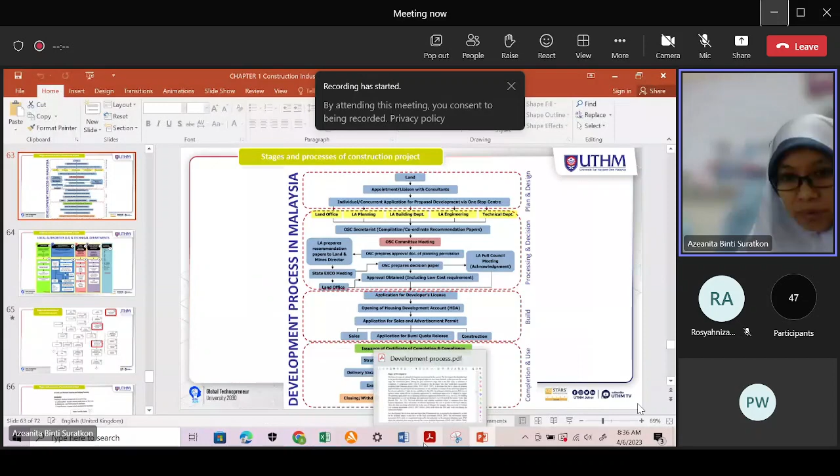We will see a little bit what is OSC after this. So and then we go to this part, maybe we go to this first line. This is the explanation for the development. There are 3 stages in project development.

The first stage is planning stage, or we call it pre-development period. The first stage is to get the approval. As you can see just now, we have to go to the OSC to get the approval for the development. Then goes to the second stage, which is the construction stage, and then continues with the post-construction stage, which is the third stage, a certificate of compliance, CCC. Certificate of completion and compliance, that is CCC.

And then they will complete their house. Once the developer completes their house, they will get this certificate of completion and compliance. So we have here OSC, one stop center. Let's have a look at this one stop center.

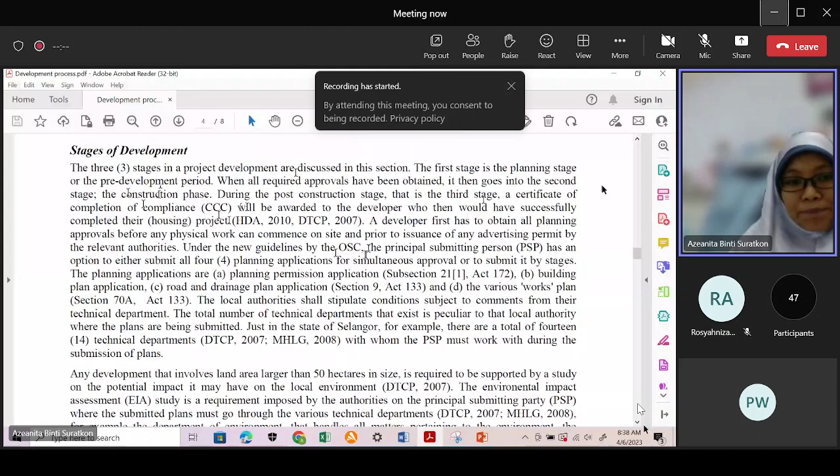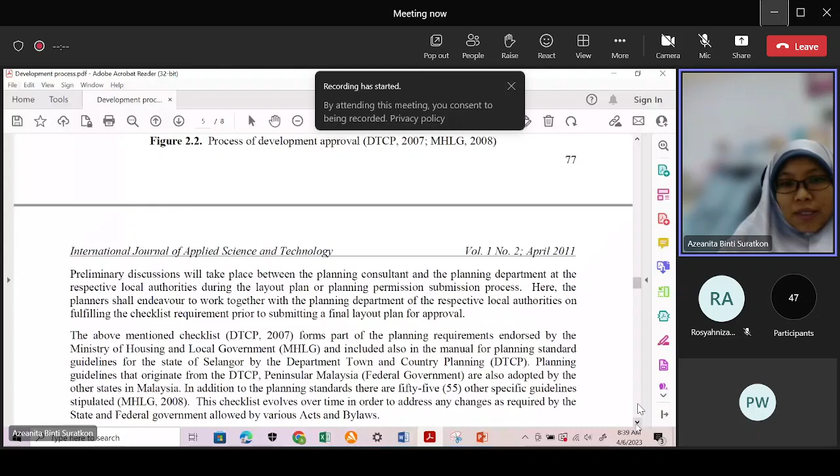Okay, let's go to one-stop center. What do we call this one-stop center? Okay, sorry, we are on this one-stop center. This one-stop center is actually an independent body.

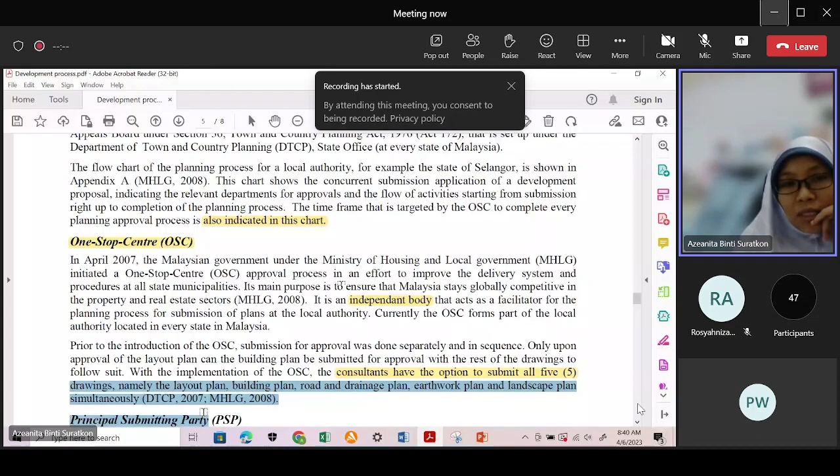It acts as a facilitator for the planning process for submissions of plans at the local authority. Before this, we had different local authorities, so consultants needed to submit to different local authorities. But by having this one-stop center now, the consultants can have the option to submit all 5 drawings - layout plan, building plan, road and drainage plan, earthwork plan, landscape plan - simultaneously to this one-stop center. The one-stop center is normally at the local authority, at state council, maybe local municipal majlis daerah, something like that. So we have this one-stop center.

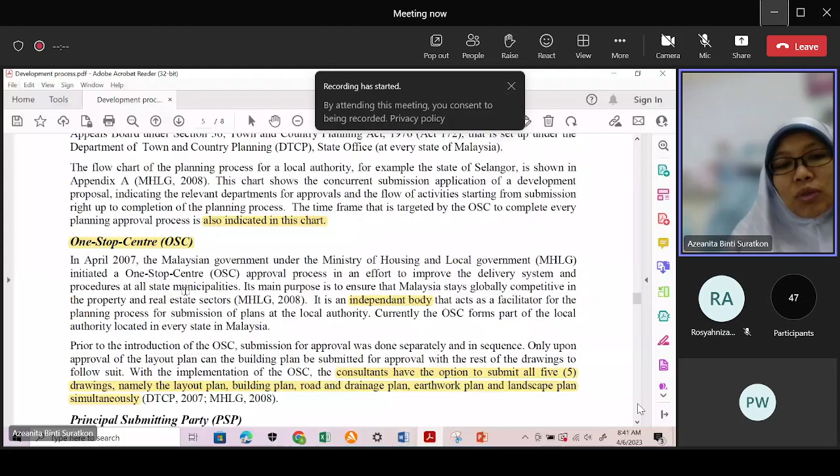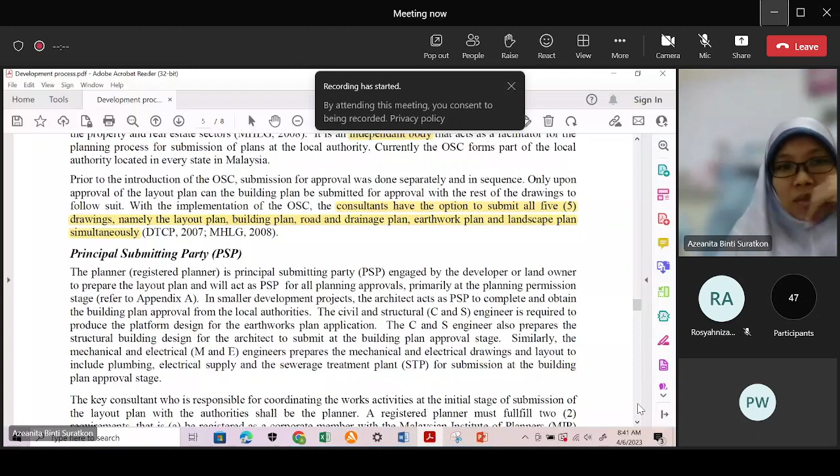We also have this important terminology, principal submitting party (PSP). Who is the principal submitting party? Normally the registered planner is the principal submitting party, engaged by the developer or landowner to prepare the layout plan and act as PSP for all planning approvals.

Primarily at the planning permission stage, normally it's the planner. In smaller development projects, it's the architect. So for a specific construction project, the architect acts as PSP to complete and obtain the building plan approvals from the local authorities. For big development, like town development, it will be covered by a town planner as the PSP.

But for very specific, smaller development projects, the architect acts as PSP to complete the building plan approval. Normally for a specific project, we just focus on the building plan approval.

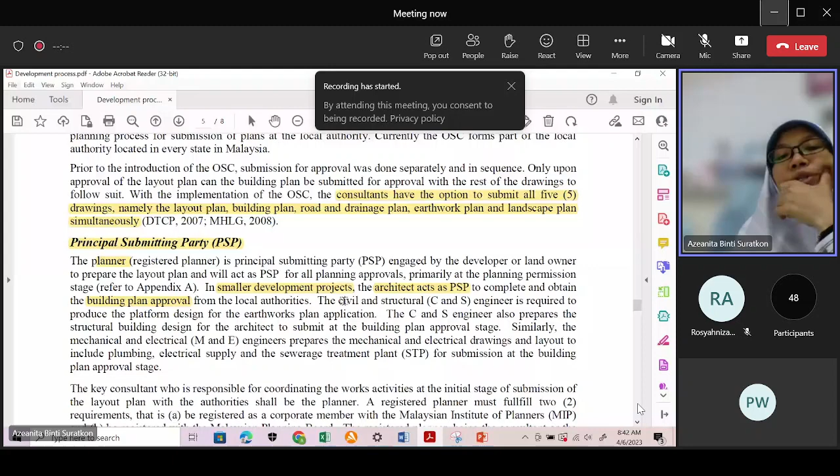All of you civil engineers in the making - the civil and structural engineer is required to produce the platform design for the earthworks plan applications. The C&S engineer also prepares the structural building design for the architect to submit at the building approval stage. Similarly, the mechanical and electrical (M&E) engineers prepare the M&E drawings and layout, including plumbing, electrical supply, and the sewerage treatment plant, for submission at the building plan approval stage.

So this is in detail - at the building approval stage, not only will architects submit their plan, but you as well, as a civil and structural engineer, and also mechanical and electrical engineers, have to submit your plans for building plan approval purposes.

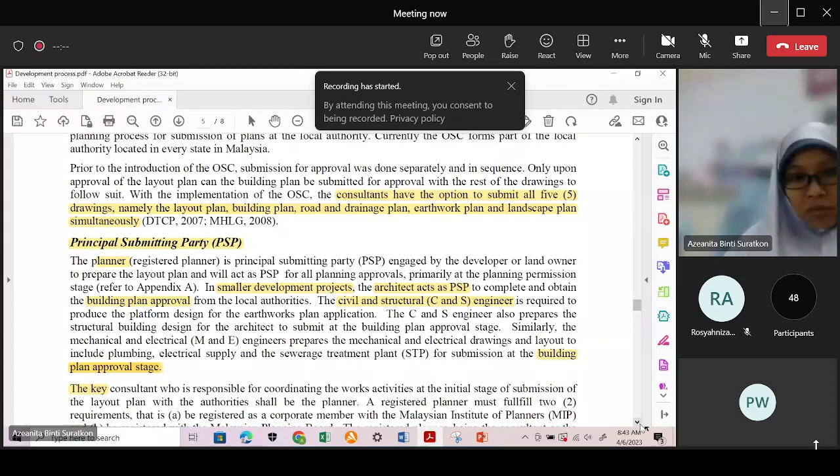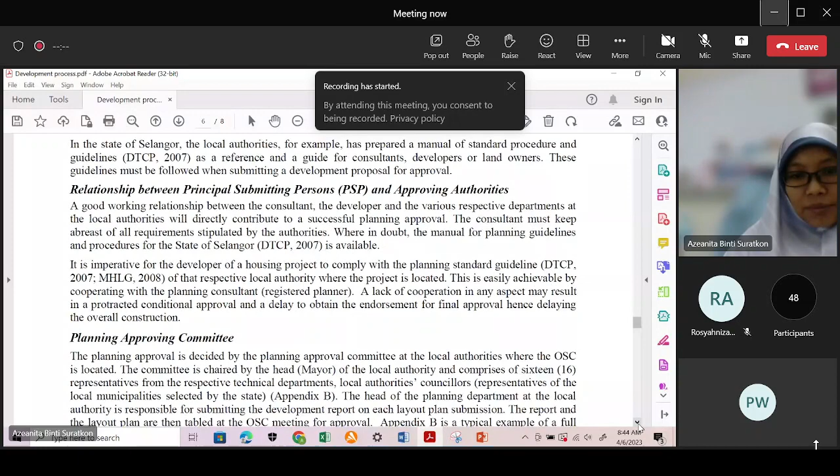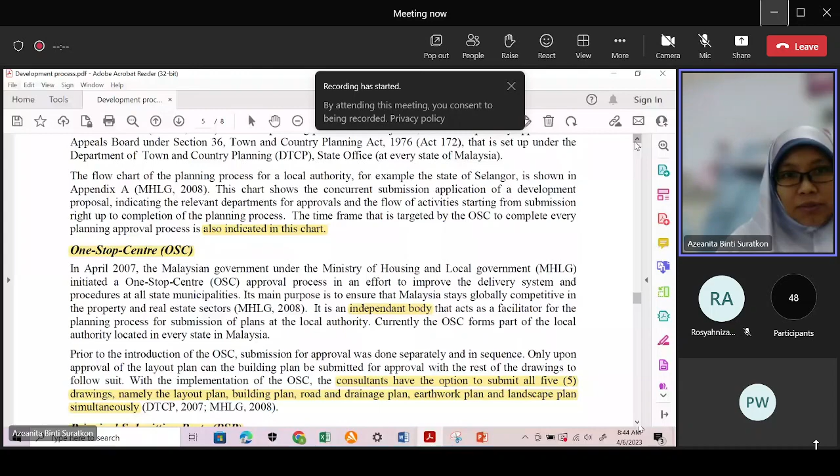So this is some of the things which I think are important - this is for Selangor. Let's have a look, I think this is also important.

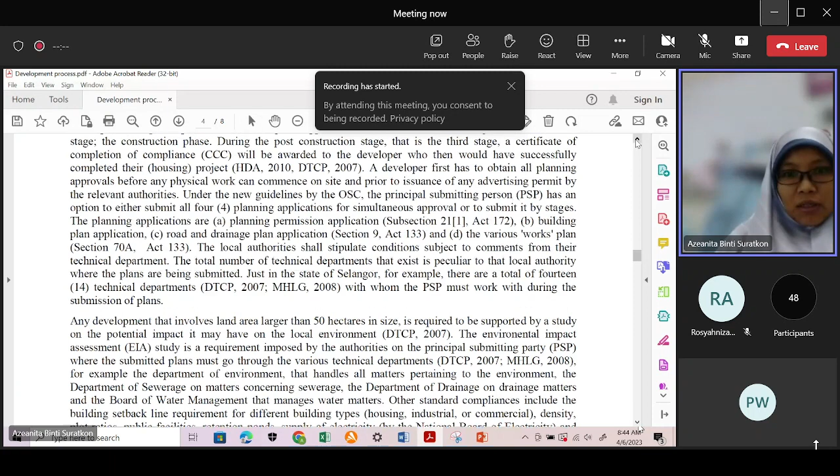So we have a PSP here for the building application or planning permissions. This covers planning permissions, building plan application, road and drainage plan application, and various work plans. Local authorities shall stipulate conditions subject to comments from their technical departments.

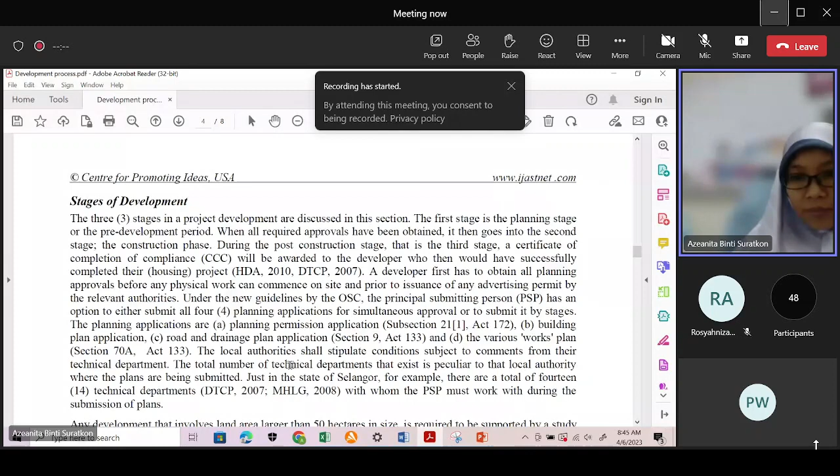So all these drawings will be submitted to the local authorities and they will give comments. If they have comments, the developer team or consultant team needs to rectify and prepare the drawing or plan again, and resubmit it until they get approval. I think this is important for you to know.

Any development that involves a land area larger than 50 hectares in size is required to be supported by a study on the potential impact it may have on the local environment. This includes an EIA, Environmental Impact Assessment study, a requirement imposed by the authorities on the principal submitting party, where the submitted plans must go through various technical departments.

So for example, for town development, a very big development since we're talking about 50 hectares, they will do the EIA. The PSP here is normally acting on behalf of the developer, maybe a town planner or whoever. This is normally for a big township, so they have to submit this EIA as part of the plan.

The submitted plans must go through the various technical departments, for example the Department of Environment (DOE), which handles all matters pertaining to the environment. Then the Department of Sewerage, on matters concerning sewerage, the Department of Drainage (DOD), and the Board of Water Management that manages water matters.

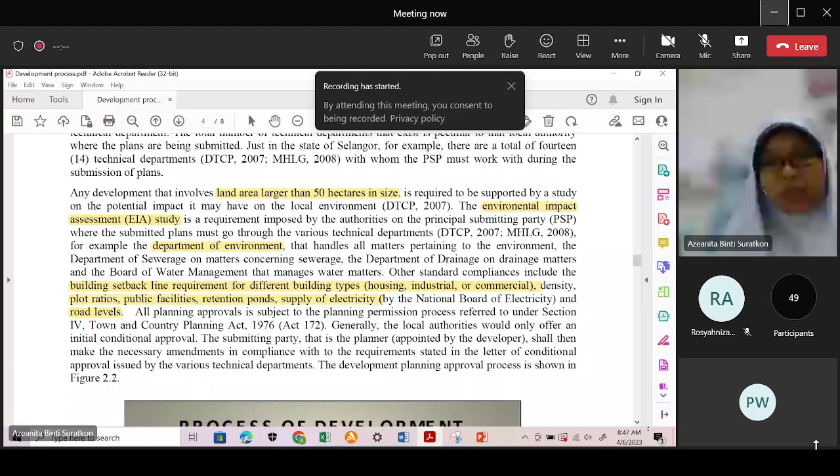Other standard compliances include the building setback line requirement, which is important for different building types - housing, industrial, commercial - plus the density, plot ratios, public facilities, retention ponds, supply of electricity, and road levels. All these need documents submitted to get approval from this party.

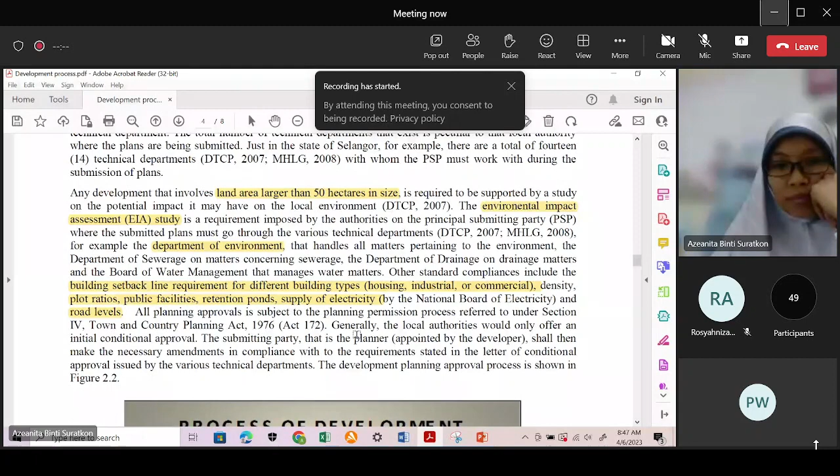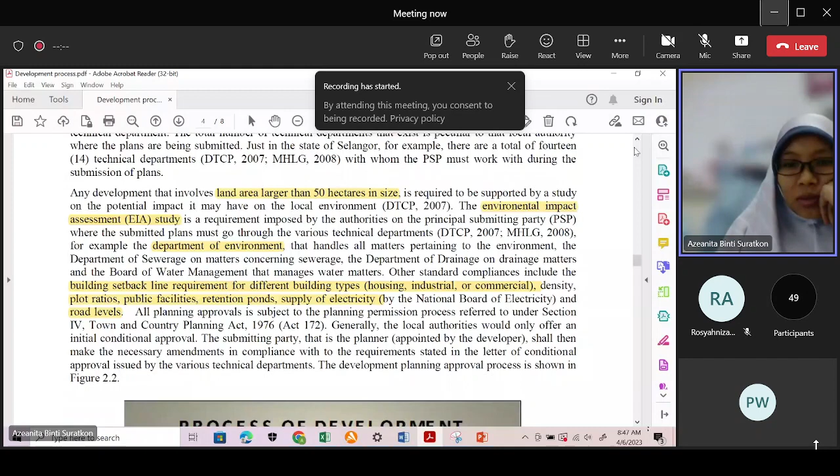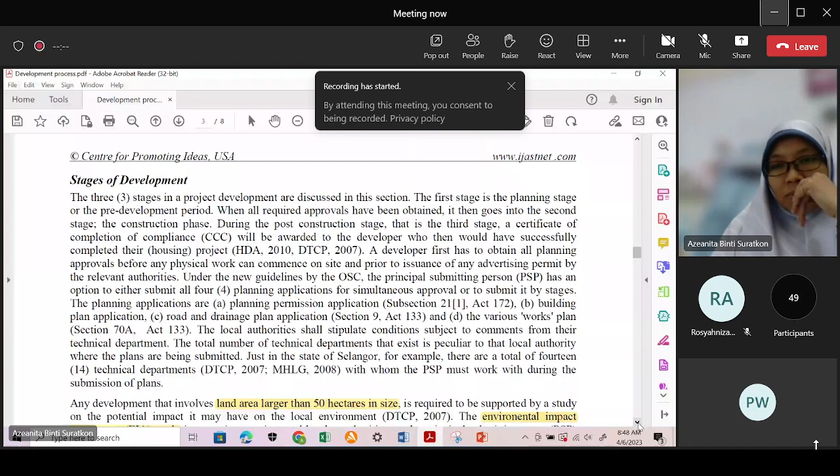Any questions, class, so far? So I think so far so good, Doctor - it's important for this. We come back to this, so like I said just now, we have this.

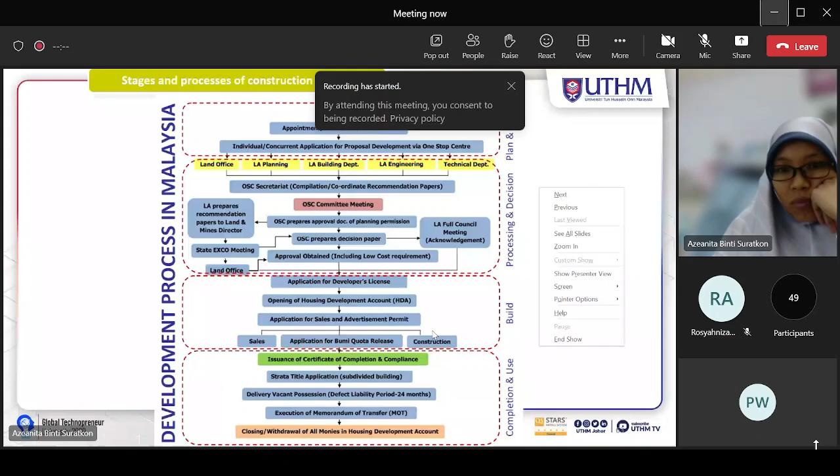So we have this OSC here, CSO, SC, OSC, One Stop Centre. It involves land office, planning, building department, engineering and technical department.

The OSC Secretariat will compile and coordinate the recommendation paper. From all the plans submitted, the OSC will organize a committee meeting. They will look into the documents and do the comments. Then OSC prepares the approval document of planning permissions.

OSC prepares the decision paper, and then they will prepare a recommendation paper to the Land and Mines Director, and they will have a state exco meeting, especially for government projects, followed by the local authority full council meeting.

So this is the process of looking at all the plans. From the plans, they will decide whether they want to approve the project to proceed, whether the project can be given green light to proceed. This is the second stage, and then the third stage is actually construction.

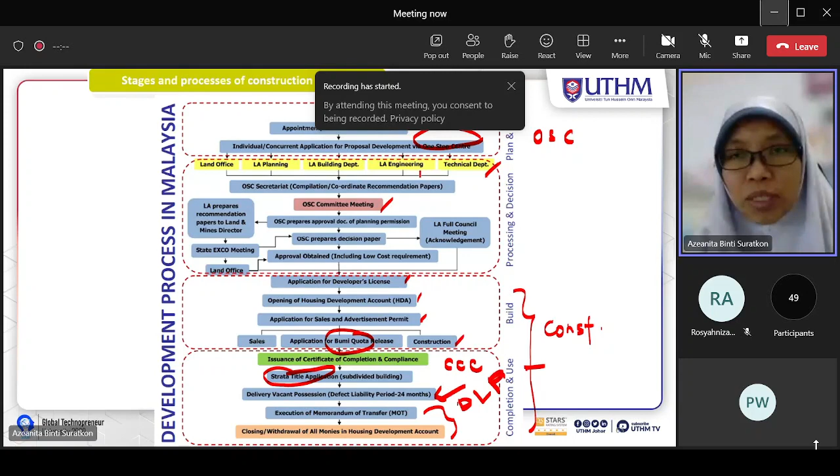The architect is already involved at this stage - architect, engineer, consultant - basically they are already involved here to help the client submit all the plans for approval purposes before they get the building approval. After that, only then they can do the project, and they can call for tender, they can start the construction.

So these are the 5 local authorities and technical departments which are actually responsible to give approval. They have to review all the plans submitted by the developer or by the client for the projects - land office, local authority, planning department, building department, engineering department, and also technical department.

So these are the 5 local authorities and technical departments. All of this is under OSC.

So this is the detail. This is actually a more comprehensive development process, but we are not going to touch everything, just maybe a few things.

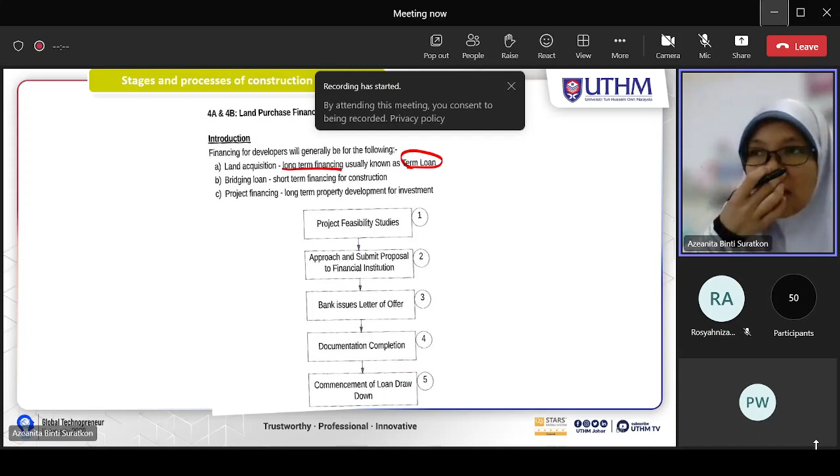Financing for developers will generally be for the following: land acquisition. So he has to buy the land, and apply for a term loan, which is normally referred to as long-term financing, because land is very expensive, so it will involve a large amount of money.

And then bridging loan, this is normally for short-term financing for construction. Construction normally spans 2 to 3 years, so this is what we call a bridging loan.

And then project financing, long-term property development for investment. This is on the side of developers. Maybe for construction contractors, they just look at this - short-term financing for construction.

This involves project feasibility studies, approach and submit proposal to the financial institution. These are the processes. And then the bank will issue the letter of offer to provide the loan or the investment.

And then documentation complete, and then commencement of loan drawdown, meaning the developer will get the payment, the money that they need to acquire the land.

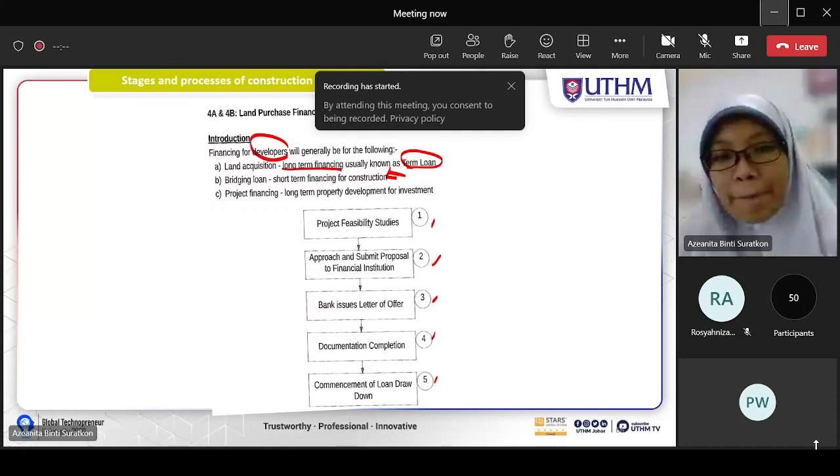Documents required for submission of proposal: brief description of project, copy of land title, layout plan. So at this stage they already have to have this layout or building plan if available. Forecast income statement and cash flow, and redemption and repayment forecast - meaning how actually they will pay back their loan.

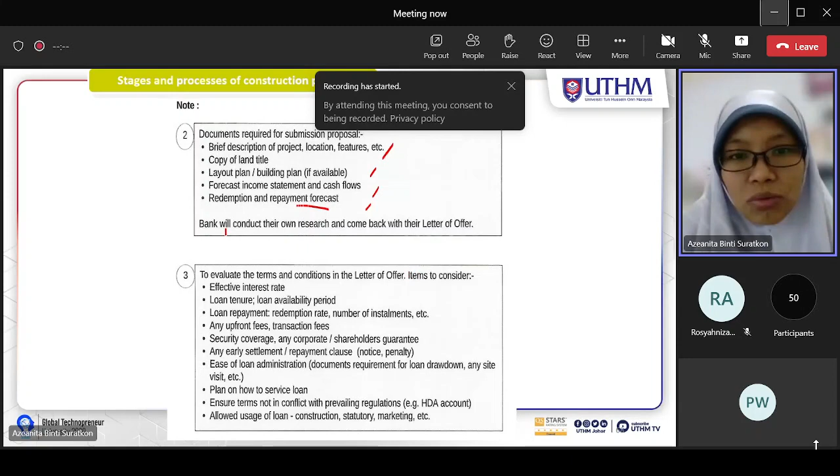The bank will conduct their own research and come back with their letter of offer if this loan application is successful. To evaluate the terms and conditions in the letter offer, items to consider.

So in order for the bank to evaluate the application, the bank needs to see the effective interest rate, loan tenure - how long the loan is, 5 years, 10 years, 20 years - and then loan availability period, loan repayment, any upfront fees, transaction fees. So this is sometimes extra cost that needs to be covered for the purpose of the loan.

And security coverage, any corporate or shareholders' guarantee if the loan is made by one or two parties - they have shareholders to do the loan. So this needs to be looked into.

And then if any early settlement - meaning if for example the loan is agreed for 10 years, but if the developer can pay back maybe after 7 years, they can fully settle all the loan - so what is the process?

Ease of loan administration, the documents requirement for loan drawdown and site visit, etc. Plan on how to service the loan - how they are going to pay the loan.

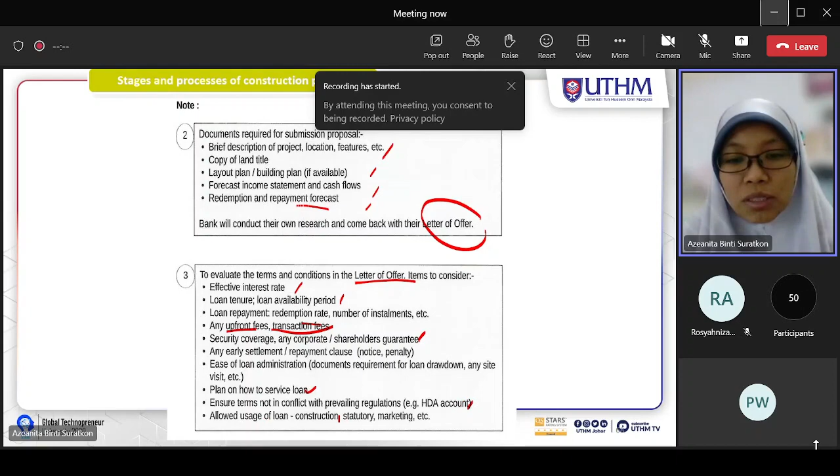Ensure terms are not in conflict with prevailing regulation. For example, this is the housing development account, and allow usage of loan for construction, statutory, marketing, etc.

And then acceptance of letter of offer. So once this letter of offer is produced by the bank, the developer needs to accept the letter of offer - the offer letter.

To obtain necessary approval and authorize the relevant person for execution of loan documents - all these things, they need this.

And then completion of condition precedents. For loan drawdown, to submit documents required for drawdown - architect certificate, contractor's claim - so all this is required. To complete the loan document.

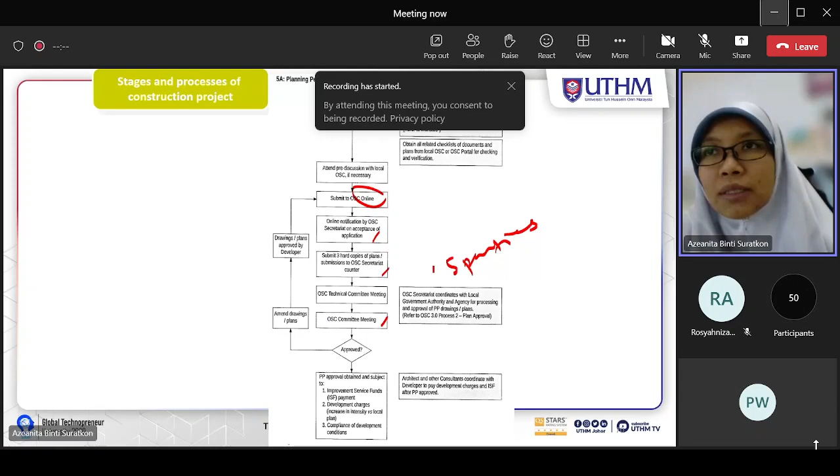So we already see 5 parties just now, right? Including the technical committee meetings and committee meeting that involves the 5 parties, including the land, the planner, and the rest. The 5 parties I showed to you here: building department, engineering department, and technical department.

So if approved, planning permission approval obtained and subject to improvement service fund payment, development charges, and compliance of development conditions. So it is approved, but it is subject to all this. Architects and other consultants coordinate with developer to pay development charges and improvement service fund after PP is approved. So this is planning permission.

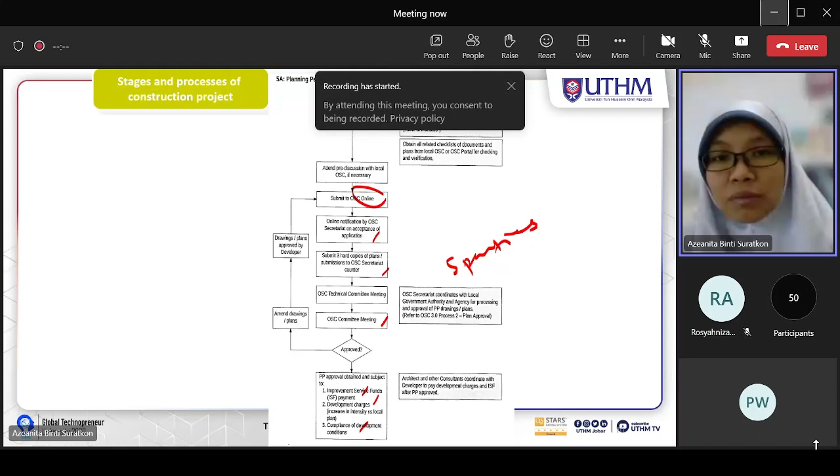And then building plan, BP approval. So PP must be obtained first, and then matters already settled, settled on conversion, subdivision, surrender or realienation. BP engineering drawings, plans approved by developer, they will submit to OSC online again.

Architects and other consultants will make sure all the requirements by the local authority department and agency are fulfilled in the plans and drawings they prepared. So this is also the same now on the notification, submit the copy, and then OSC will have this technical committee meeting and OSC meeting. OSC secretariat coordinates with local authority and agency.

OSC technical committee meeting involves internal departments, JPI, JPP, landscape. And then for this one, OSC committee involves external agencies such as Bomba, then Office Syahbandar. So that is two different parties for technical committee and also OSC committee.

If a condition is approved, take action to comply with improvement requests, conditional approval - meaning normally it is very rare to pass this technical meeting and committee meeting of OSC without any comment. So that's why we call it conditional approval. It's very difficult to get unconditional approval, so normally it is conditioned, so still have to do some amendment.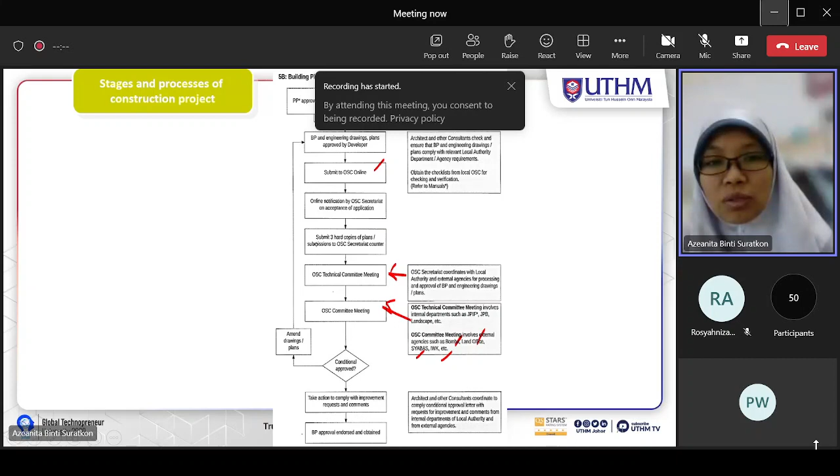Once all the comments being ratified, take action to comply with improvement requests and comments, and BP approval is endorsed and obtained. So this is the smooth one. But if they have to amend, they have to amend everything and come back again to this process. This stage actually will take some time, so that's why at the very beginning architects and consultants need to check everything very carefully because they don't want to repeat this stage.

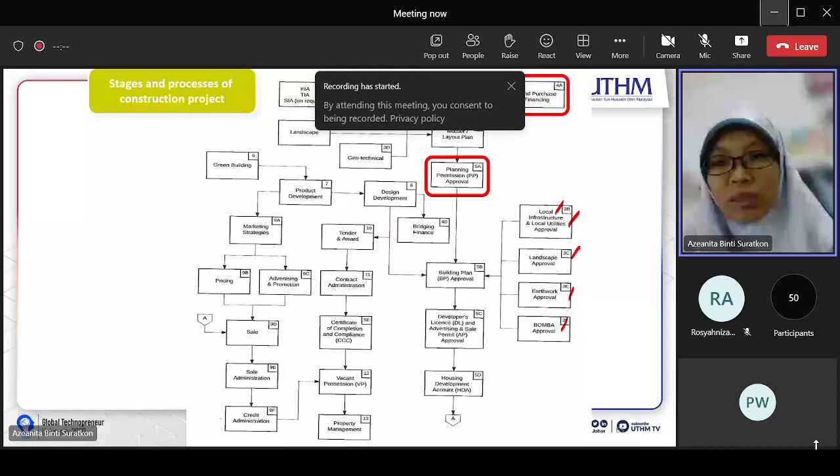I think that's all. Any questions, class? Do you want me to repeat anything in this chapter 1? You want me to repeat to get more explanation? Please let me know.

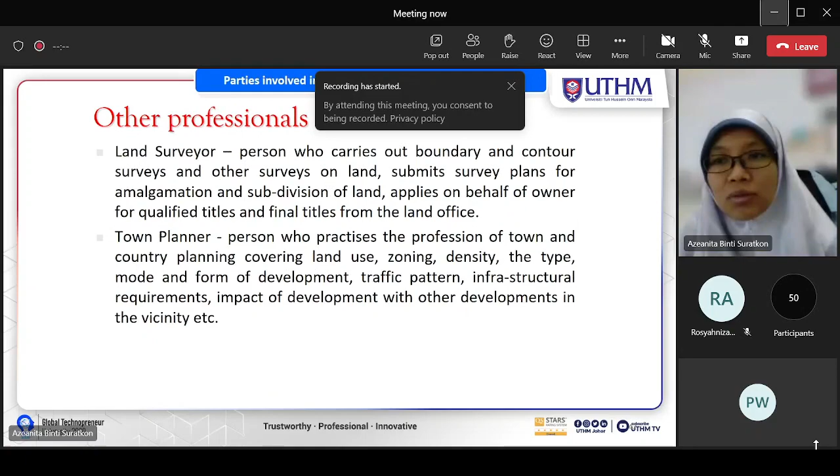Yeah, so maybe we just, because we still have time, right, so what is important in this chapter? Actually you need to know this one.

For this one, CITP and also NEP is actually your general knowledge, but I think it is good if you try to explore all these things. So for this purpose, I will give maybe just a short task for group, just to help you initiate the group before you have the instruction for your project. So I will give a simple task for this NEP and also this CITP, just to make sure that you read this, so you know what it is.

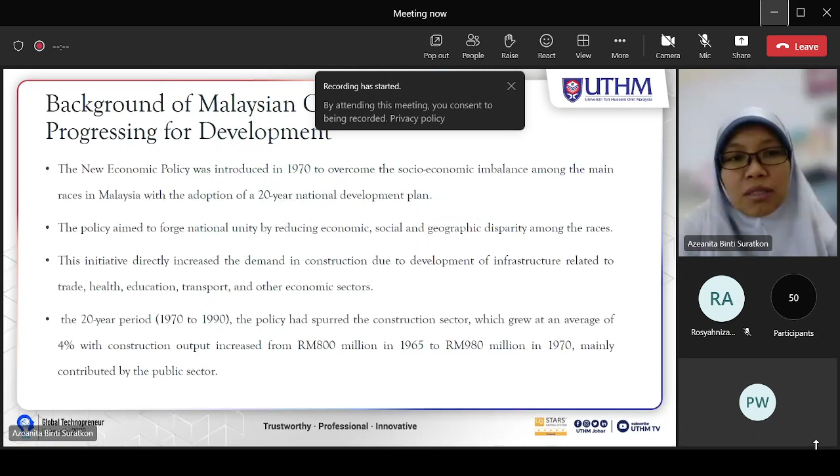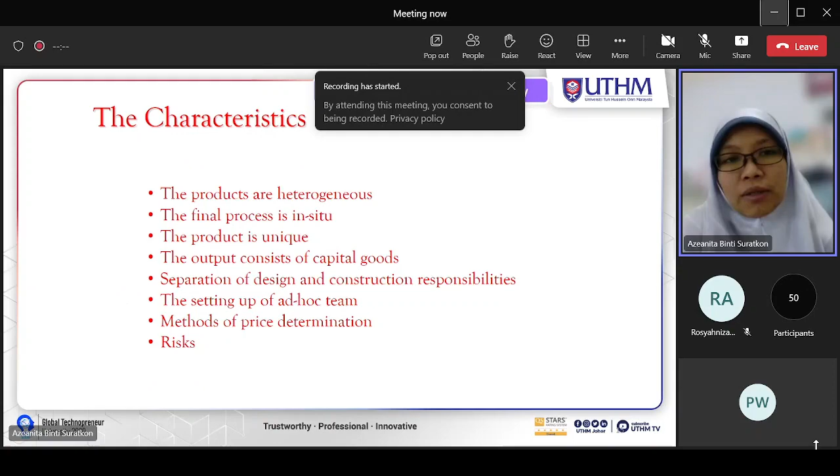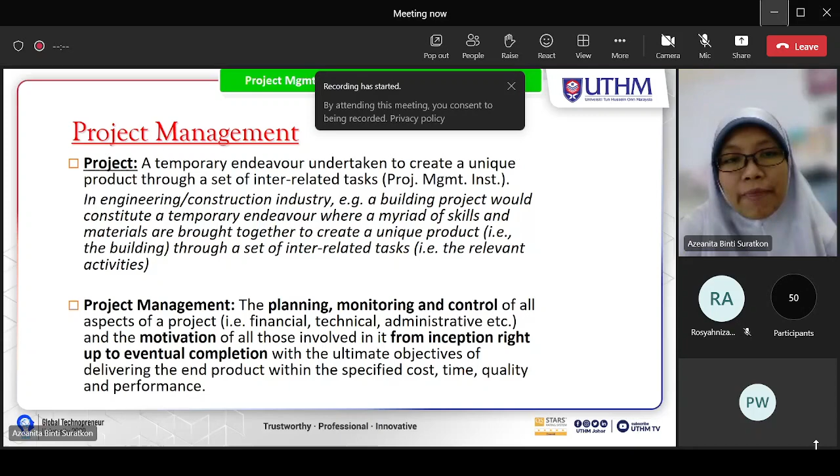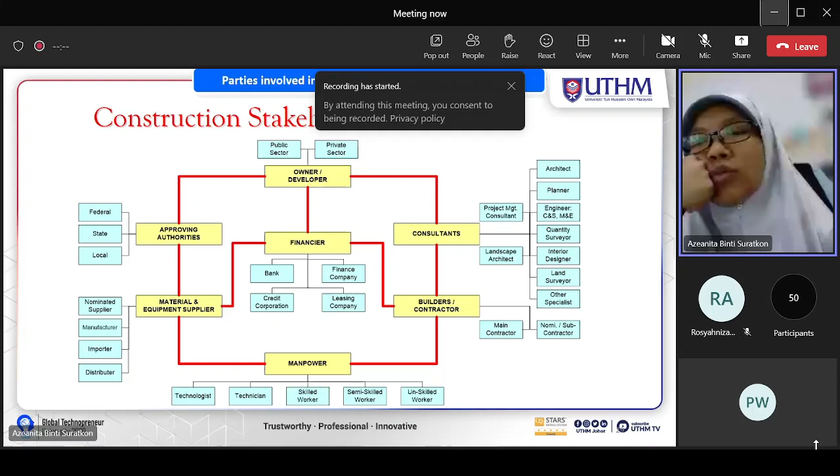The focus for this chapter is normally on the characteristics. You need to know this. And then you need to know the terminology as well, especially the project management terminology, because this is the subject. And then construction stakeholders is also very important. Normally the question will ask you to consider some situation, so who is involved, what is their role, what they do.

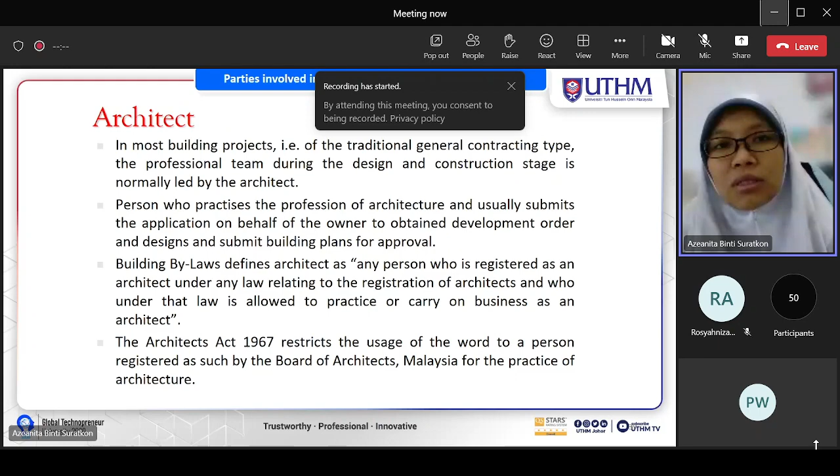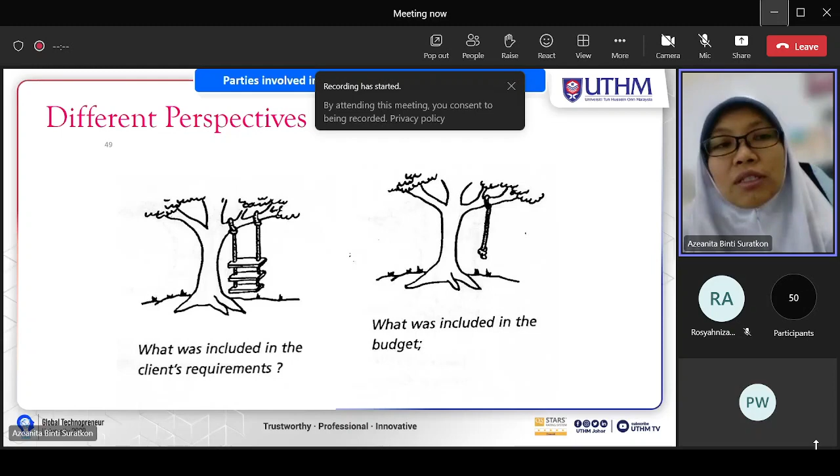Related to stakeholders, the different perspectives is also what we already discussed last week. So this is also one of the questions that may come out in your test or final exam.

And then this one, stage of project. This is very important because it relates to project delivery method or procurement method. We use this procurement method, which we are going to learn in chapter 7, but you need to understand it from now. Because for example, this is for the traditional procurement method, or we call it design,

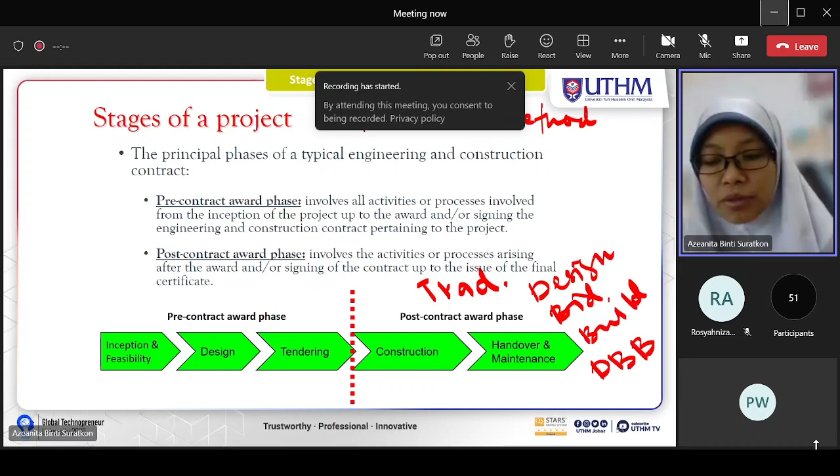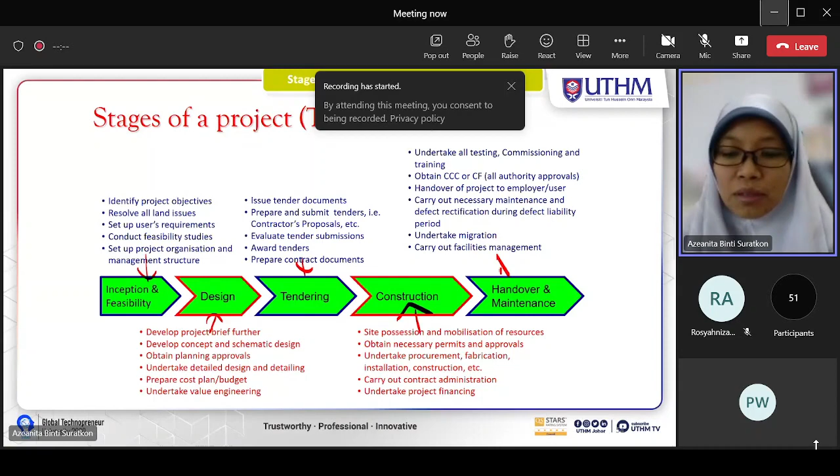bid, build, or DBB. So you need to understand this, and then you need to know what are the key activities involved in every single stage. You need to know this, and you need to know as well who is involved in each stage.

As we just discussed, inception and feasibility involve planning permission. As you can see, this involves the town planner, developer, maybe a research firm, valuer, real estate. In this early stage, inception and feasibility is actually the process we just learned, involving planning permission approval.

And then for building planning approval, that is actually at the design stage. So here, normally, because they need to have some planning permission as well, they need to have this at the early stage, just at the end of inception and feasibility and the early stage of design. So they need to have this planning permission application.

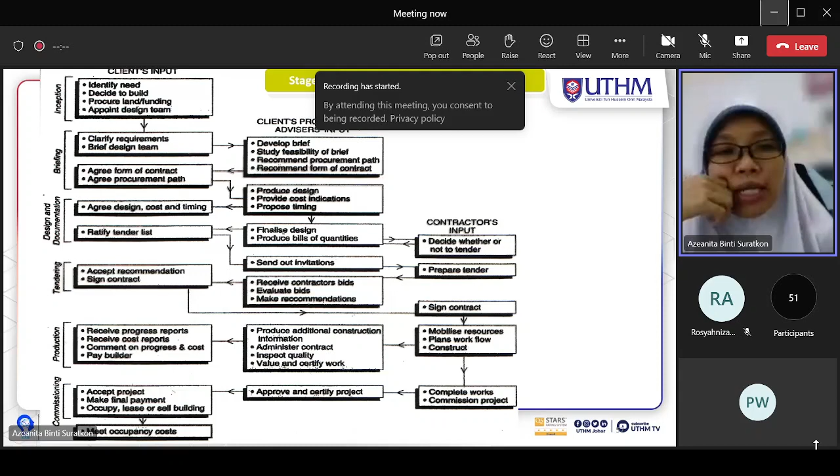This is also important because this is related to another procurement method, which is design and build, or we call it DB. Normally this is the process.

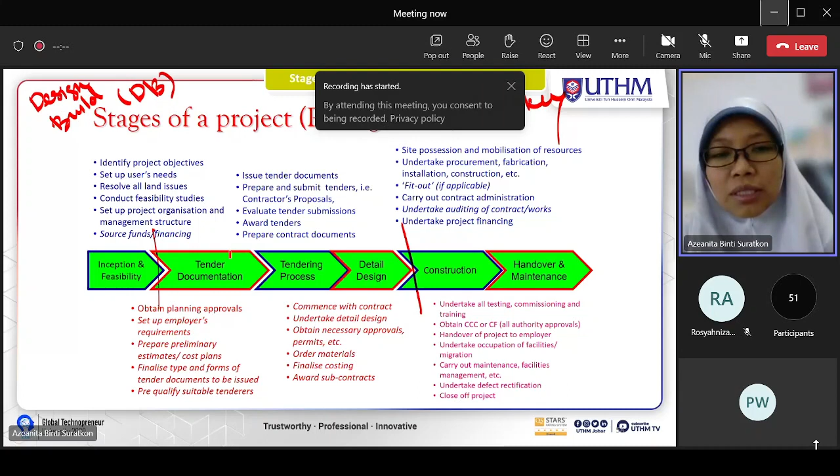Remember the difference with the traditional one? Here, the tender documentation up until the detailed design - this is what makes the biggest difference between DBB, which is design bid build, and this package deal, DB, or what they call turnkey - is actually this tender documentation, tendering process, and detailed design.

So this tender documentation, I think I want to repeat since we have time. This is actually the process where the employer wants to do some preparation to appoint the design and build contractor. That's why the employer will set up the requirements - employer requirements, or the terminology is need statement.

So this is on the client's part. They do all these things, and then they will pre-qualify suitable tenderers. So this is actually on the client's part.

Next, they will issue tender documents. And then here is the design builder, the bidders, or the design build contractor. They will prepare and submit the tender, the contractor's proposal. Because this normally involves design, their proposal normally involves design, mainly, and also the cost.

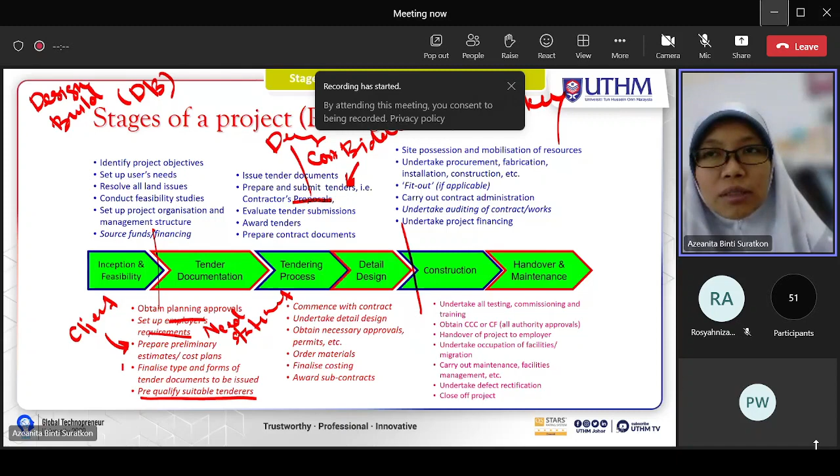Meaning at this stage, maybe the client's consultant will just provide this need statement or some portion of the drawing for the project. Then at this stage, in the contractor's proposal, the design builder will come up with complete drawings on his part, based on how he perceives continuing the drawing from the consultant. Maybe, for example, the client's consultant only prepares about 30%. So in this contractor's proposal, he will try - not in detail yet, but he'll try to give his idea of the design, the concept, not very detailed yet, but just good enough to present his idea, and then do the costing for his purpose, to come up with the cost he wants to offer to the client.

Okay, right, so that, and then here detail design. This is actually the design builder.

So the DB, design builder, is officially involved during this detailed design once he is already selected as the contractor to handle this project. During detailed design, once his proposal is accepted by the client, he will detail out all the design and obtain all the necessary approvals and permits. This is done before the construction stage starts.

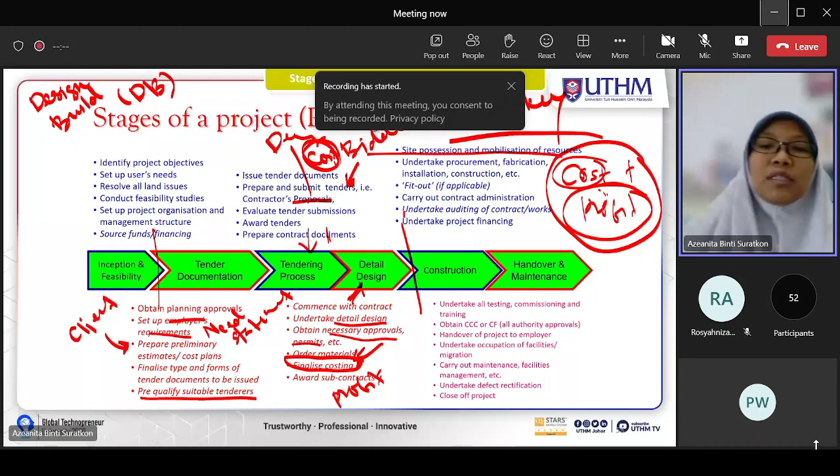Because he has to take a big part of this profit to cover any changes, meaning if the costing exceeds what he has already submitted to the client, this is actually a very risky project delivery method, especially for the contractor, because he has to cover the risk of fault in the design and also fault in the construction. Because he is the one who prepares all the design and manages all the construction, it's very risky for the contractor.

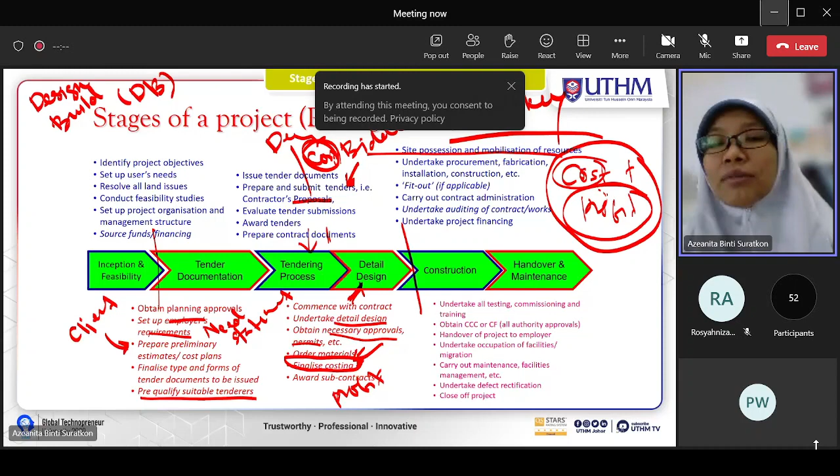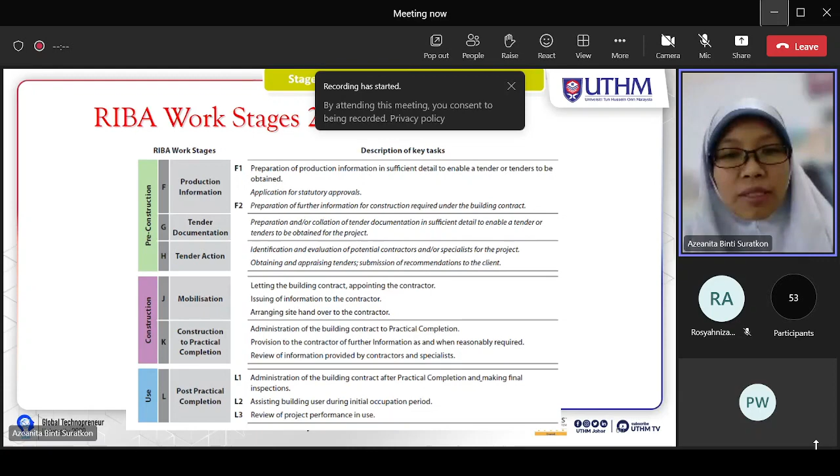Okay, so this is also a way of how the work stages are explained and divided, as you can see.

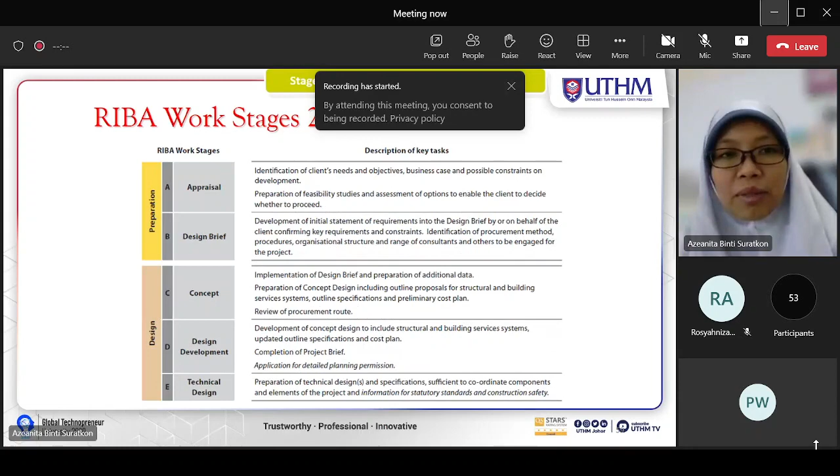That is the most important part. The remaining is for your knowledge. I hope you can understand, because we want to expose you to the real work, so you are not only involved during construction, but also involved in earlier stages. Hopefully you can get an idea of which phase, as a civil engineer, you will start to be involved in a project.

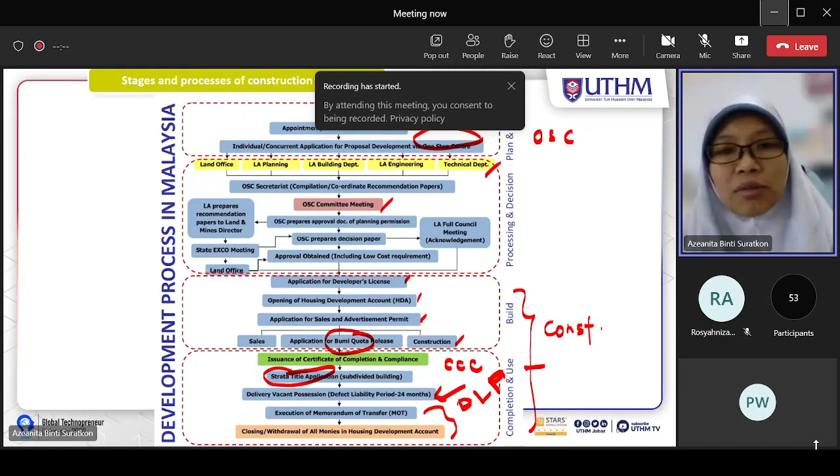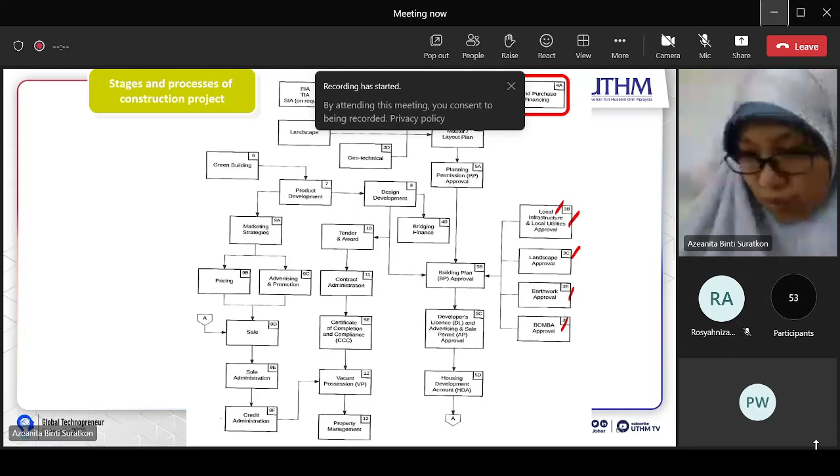Okay class, I think that's all. Any questions, class? No doctor. Okay, alright.